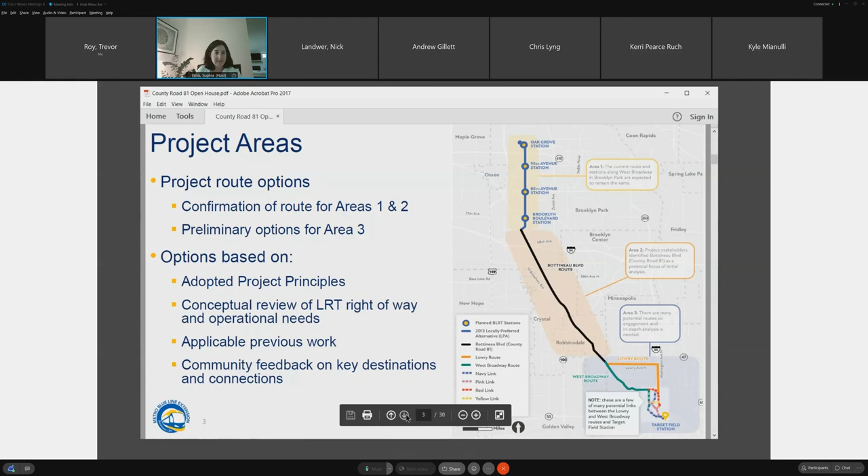The blue line is part of our overall metro system. If you get on a station in Robbinsdale or Crystal, you can connect all the way down to Mall of America, the airport, or anywhere along Lake Street, as well as within the blue line itself, or transfer trains and get across our region. This is about improving transit for our region and having fast, frequent, reliable service that you don't need to schedule for—just hop on and get where you need to go almost any part of the day.

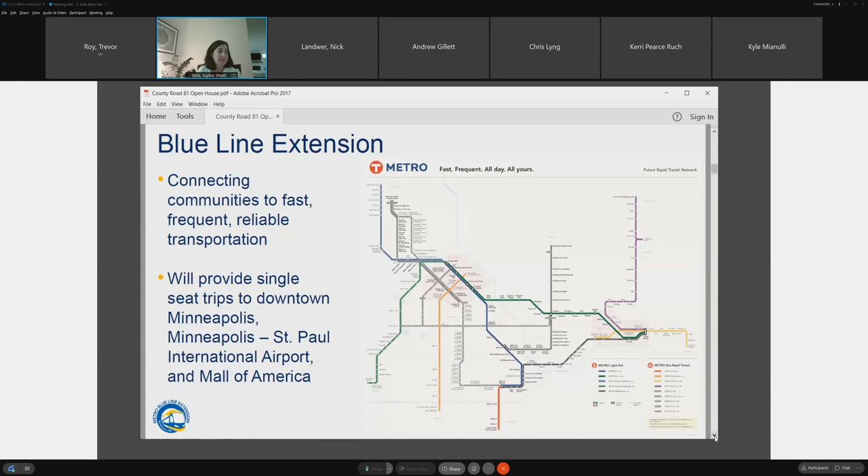So where our project is, we're in the process of identifying a community-supported alignment. Going back to that map, we had a project before, and after negotiations with the railroads really stalled out, it was time to make the decision to move forward and find a new solution.

That solution-finding path is what we're doing this year, maybe even into early next year. But that doesn't stop our project development process. We'll still need a couple years to advance our environmental documents and disclose all the stuff we have along these new routes, then get plans ready for design and construction.

Getting those engineering plans up to speed takes a little time as well. After we're in construction, it'll be another 3 to 4 years to build everything, test and install systems, and all that kind of stuff. If everything goes speedily through all of those steps, we had hoped to open the line in 2028. So that gives an overall feel of what to expect.

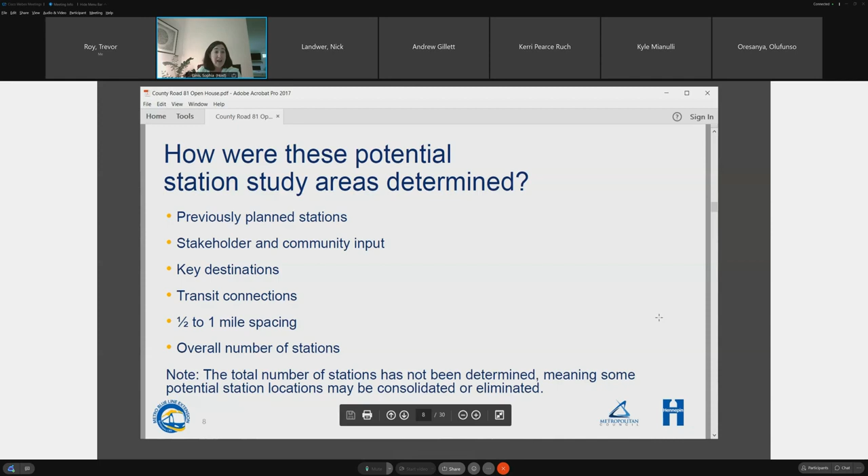The final number hasn't been determined yet, but we have our first blush. So with that, I'll focus on our middle section, but just want to give everybody an idea of what else is in the picture.

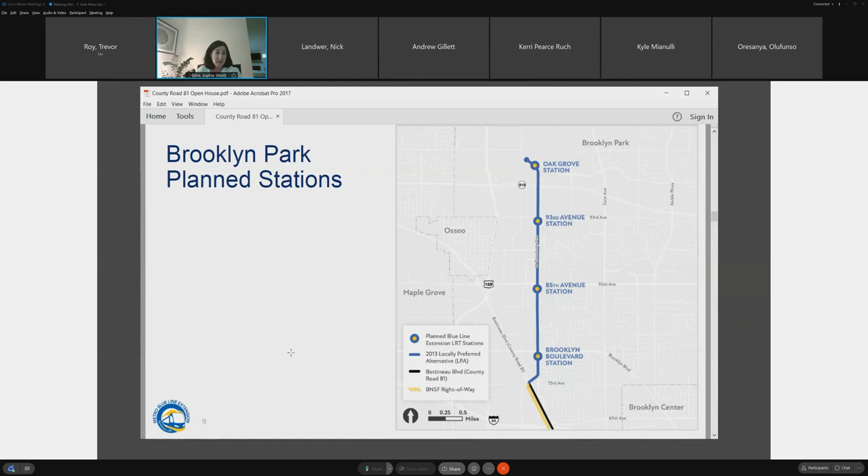Our Brooklyn Park stations on West Broadway can more or less stay the same, we can preserve that piece of the project as it is. We have 4 stations in that area serving education, business, and residential areas.

For our discussion today, and the focus of why many of you are probably here, there are 4 stations proposed right now, kind of along County Road 81. On our map some bubbles are smaller where some station study areas are longer. We need about 300 feet to place a station platform, so there are multiple options or locations where we might place some of them, representing the distance at which a potential placement would be.

So at 63rd, we're maintaining that station area, just placing the station. Same with Bass Lake Road and Crystal.

In Robbinsdale, it's a little further from our previous station locations, but still very much the goal of serving downtown Robbinsdale and the vibrant business district there, as well as some of the denser residential that is in development.

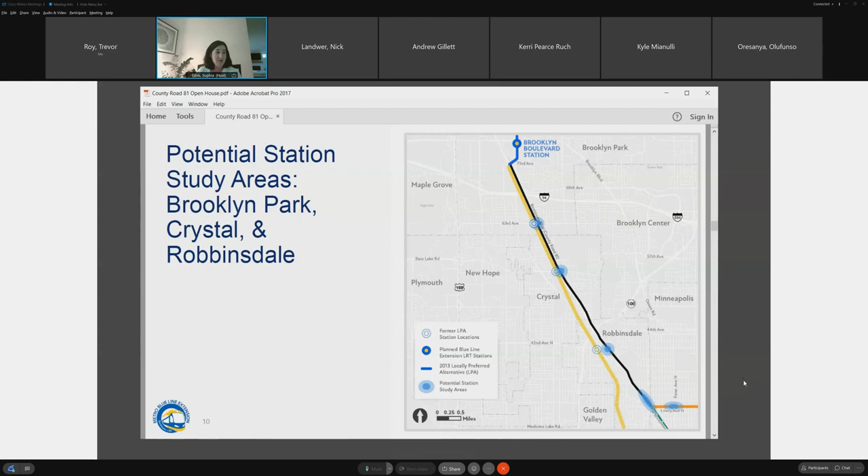This bigger station block, circle or oval, the main driver destination is North Memorial Hospital. In round 1 of the project, serving North Memorial was what we heard the most about as a missed opportunity. So as we asked the community where they wanted to go, serving North Memorial was the most mentioned thing.

I won't go into super detail for the Minneapolis area, because that's probably not why many of you are here today. But just for reference, we're placing some stations whether it's on Lowry or the West Broadway route on Penn, or in the Fremont Emerson area, as well as a couple options as we get into our downtown areas.

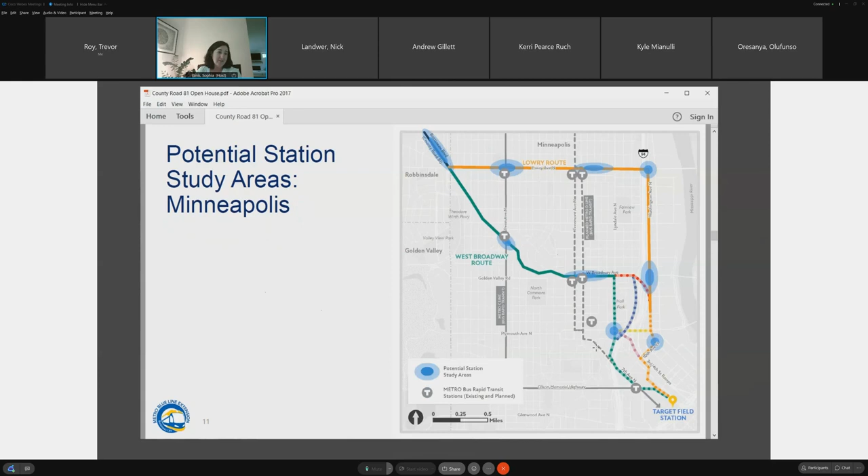So going from here, how are we going to evaluate these areas and actually place stations? It's about what best meets our project goals: not causing property impacts, reaching the most people, improving transit, what we hear from the public in conversations like this today, and the engineering requirements. How does that fit, how does it all work?

Some places are easy to place stations, for others there's a lot of geometry and things to consider. Obviously we're trying to reach people the best we can if we can place stations to better serve them. Available right of way speaks to our project principles - if there's an option between placing a station that doesn't have a big impact and one that does, that's something we'd look at.

Does it serve the people of today, and will it serve the people of tomorrow? So that's the existing and future land uses. The more people that live or work by our stations, the better this line can serve our region.

So with that, I'm going to turn it over to my colleague, Nick Landwer, who leads our design and engineering, and he can walk us through the LRT visualizations.

Okay, well, thank you, Sophia. As we get into this presentation, I just want to remind people that we pulled together these visualizations back in March.

We came out with route alignments to show where the potential routes were that we're evaluating and looking for to move forward into design. A lot of folks said, well, we need to see what this looks like. So we prepared these visualizations to show the context of how the LRT could fit within these corridors and what the impacts are. As a reminder to folks tuning in, these are very preliminary.

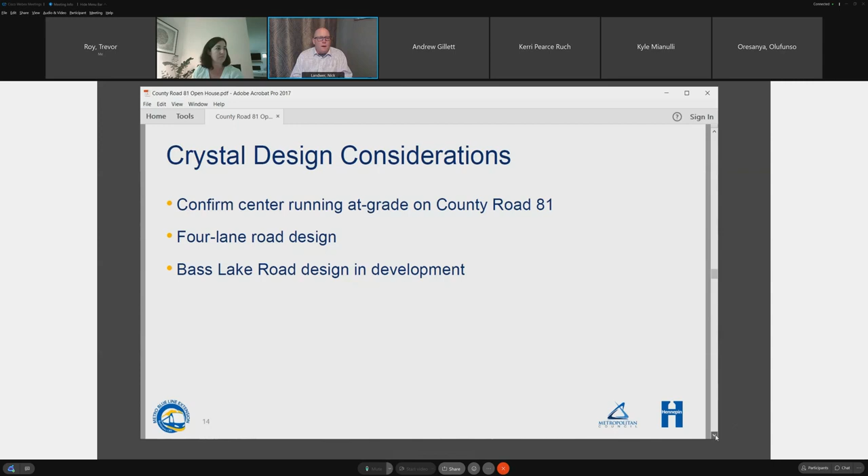Bass Lake Road is one of those intersections that we're looking at. It's a key one where there is a lot of traffic going through there, and we're paying a lot of attention to how we make that operate efficiently.

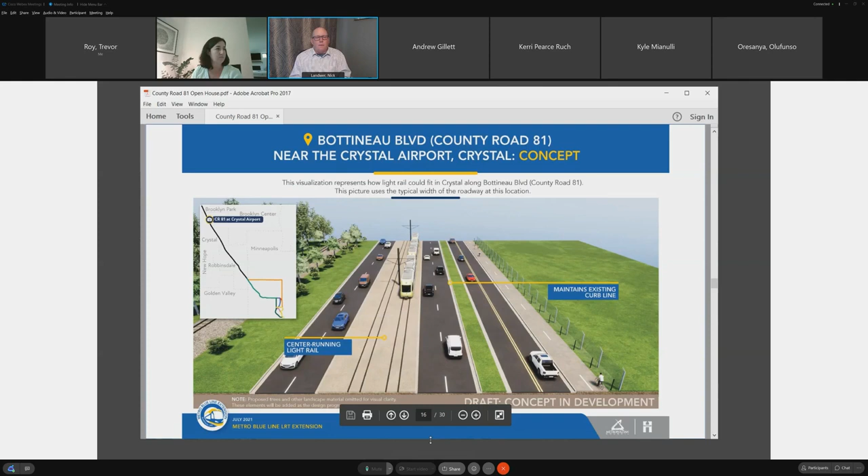So we'll go to the next slide and look at what the impacts are. This shows again the center running at grade light rail, so this is the guideway in the middle. We're able to maintain 2 of those lanes of traffic on either side of the guideway, maintain that boulevard on the east side, and continue to maintain the frontage road through here and the trail on that east side of it.

One thing to note here is as we're going down the middle of these alignments with the guideway, we can pretty much maintain the guideway and those 2 lanes of traffic in each direction within the existing curb line that's out there.

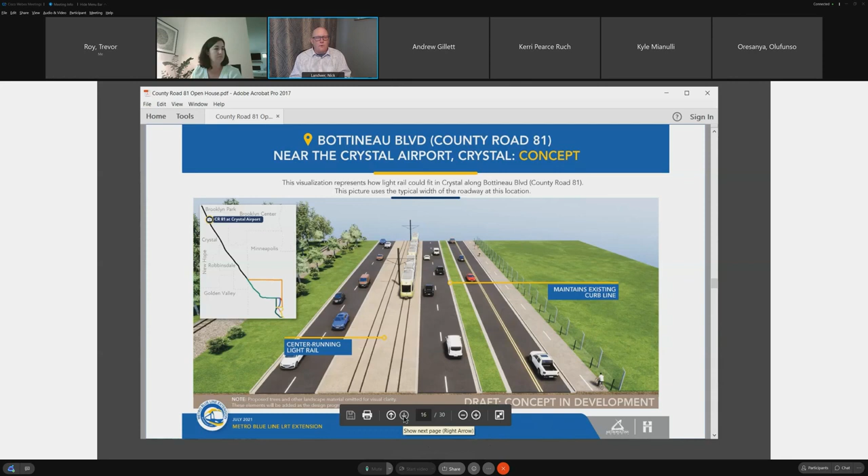So that puts some context of how this fits within the existing conditions.

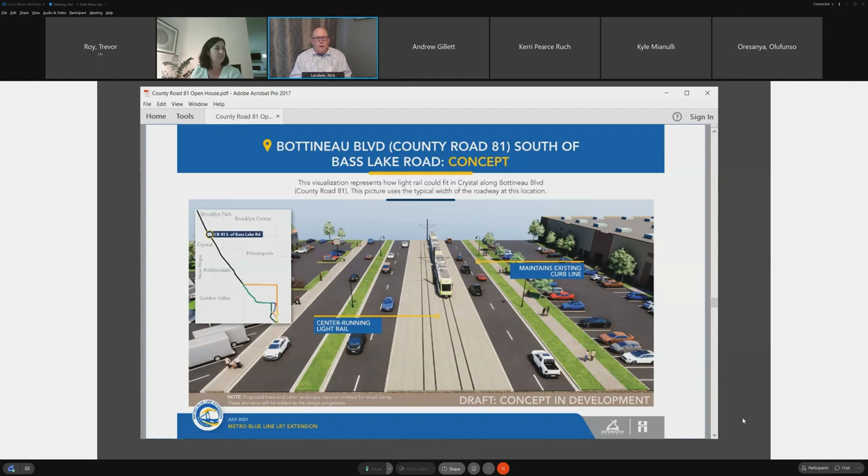So this is the impact with the center running light rail at grade here. We continue to maintain four lanes of traffic, 2 lanes in each direction. We're able to maintain the trails on the outside, and we are also able to maintain the frontage road on the west side, with very minimal impacts to the businesses along here in this rendering.

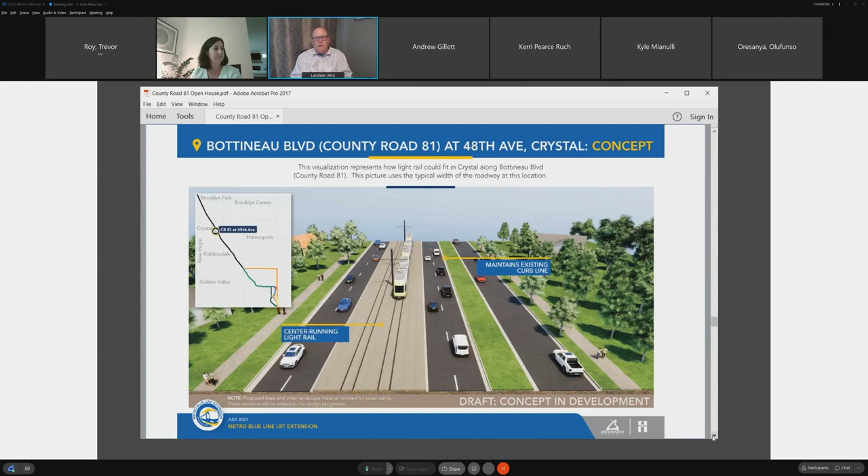With the concept that we're showing here, this again is a center running light rail at grade. We're able to maintain those 4 lanes of traffic pretty much as in the previous two, maintain those existing curb lines that are out there today, and maintain the trails on the outside and that frontage road.

So moving a little bit farther south into Robbinsdale. Some of the design considerations as we get into Robbinsdale, it's more commercial there, more of their downtown area. So we want to confirm that center running at grade on County Road 81 works well and is compatible with how that downtown area operates. We want to maintain those existing intersections, in particular the intersections at 42nd, 41st, and 40th, and 36th and 35th in Robbinsdale, maintaining the full function of those and access through them.

And then we want to really focus on safe pedestrian crossings and that pedestrian environment. One of the things we're hearing from folks is a concern that the light rail could divide up the community and make it less safe. What we want to do is focus on making it pedestrian friendly to get to either side of County Road 81 in this downtown area, to provide safe pedestrian access for the crossings, but also get our customers to and from stations safely and efficiently.

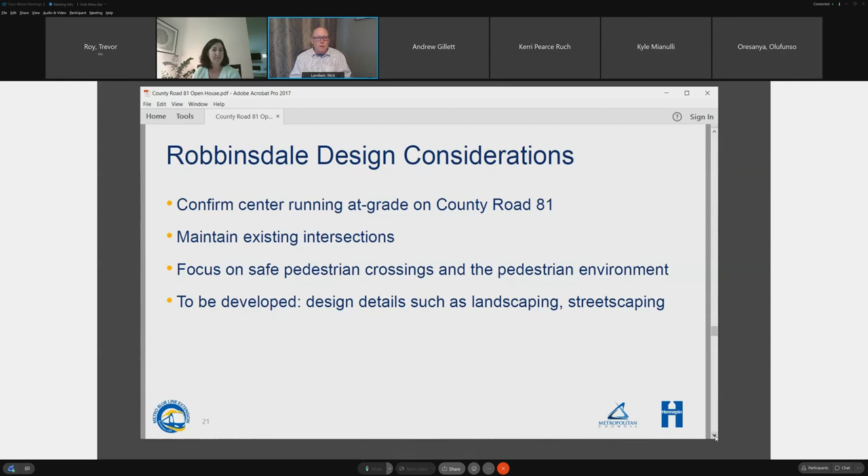Again, I want to remind that there's a lot of design details we need to continue working on as these plans develop. When we get into more of an engineering phase, we'll focus on the details, not only the roadway, guideways, and utilities, but also landscaping and streetscaping and how that fits within the project.

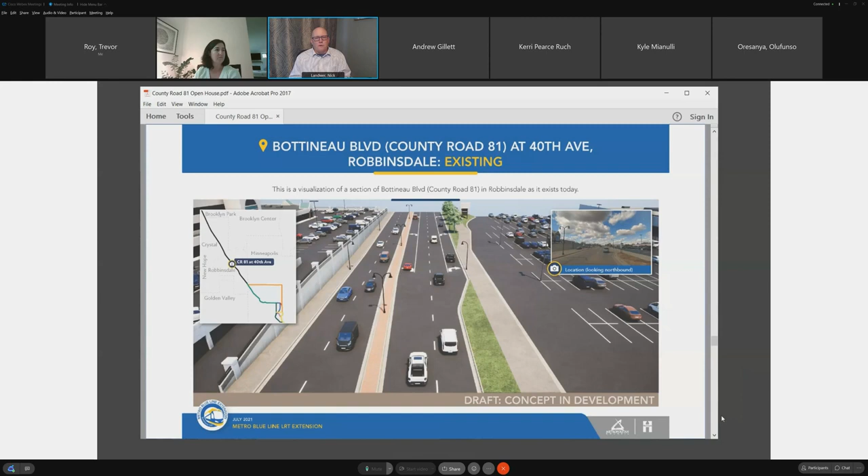So this is downtown Robbinsdale, just south of 41st Avenue, where the picture would be standing above 40th Avenue looking north. You can see on the left-hand side of the screen is Town Center with the retaining wall on that side. There's parking above that retaining wall, and we know there's parking below that also. There's a trail or sidewalk on either side of the roadway. We have a median in this location, and there's 2 lanes of traffic in each direction, so it's a 4-lane road existing here. This also shows the turn lane movements as we're going to 41st and that intersection. On the right-hand side of the screen is Robbins Center, that parking lot showing in that location for the business there.

So as we come down into the concept for the center running at grade, we're able to maintain the trails on either side.

So in this location, we're holding that wall line at town center. Depending on how grades work through here, we need to flatten things out a little bit for the trains so we get a decent grade, and we may need to reconstruct the wall on the left or west side of the screen. But we held that line so we're able to maintain the pedestrian sidewalk on that side of the road, the 2 lanes of traffic in each direction, and the functions at that intersection, the left and right hand turn lanes.

On the right side, or east side of the screen, we maintain that pedestrian trail on that side also. There is some encroachment into the parking lot for Robbins Center, and that's something that, if we have impacts on properties, we'll work with property owners to mitigate for that work and see what we can do to help out or replace that parking as we go through.

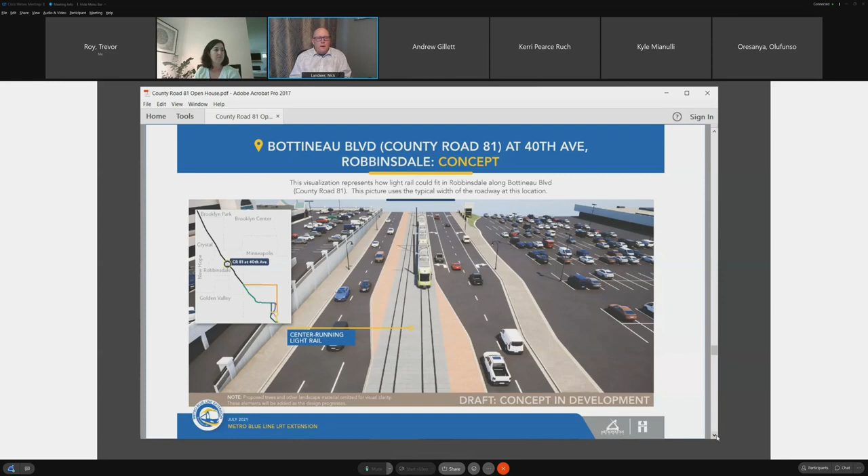One of the things that's been asked from us is, would it be more efficient if we went on a structure through here? So we were asked to take a look at what a bridge would do through this area. Usually when you put in a bridge, you're trying to address a physical or geographical issue, like a river crossing or going over a highway, or some substantial grade difference here.

But again, with the center running light rail, that light rail is running with traffic, so the train itself doesn't impact the intersections or those intersection operations that much. But one of the things we're asked to do is take a look at what a structure would look like, and this structure could be along the whole alignment also.

What we did find though is with the geometry of where you need to place the columns to hold the bridge up in place, and how they're placed crossing intersections, and again with turn lanes, a bridge really doesn't save us a lot of room on the roadway. It doesn't get us back a lot of space, maybe a couple feet here and there, but it's not a substantial difference from what has to be there to protect those columns, give them some clear zone, and with left turns and those left turn shadows that increase the median size.

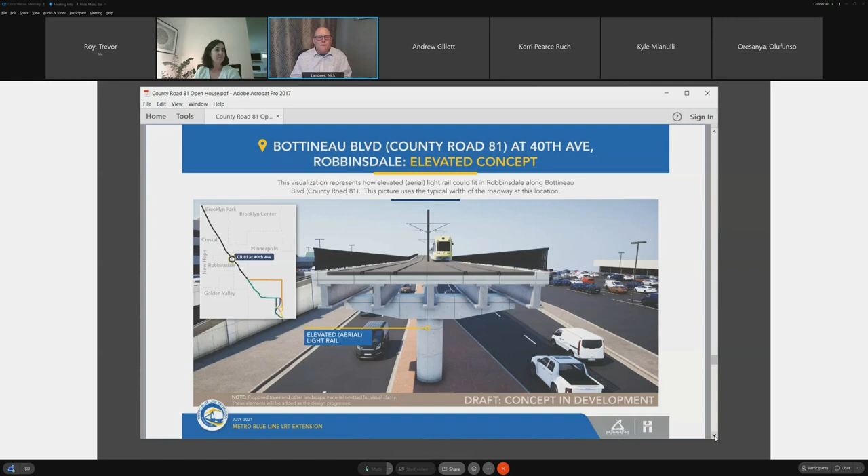And this is the concept of how the light rail will fit in there. We use a little bit of the space in the boulevards, and we use that median space for the guideway. We're able to maintain the 4 lanes of traffic through here, maintain those frontage roads on either side, and the parking over there also.

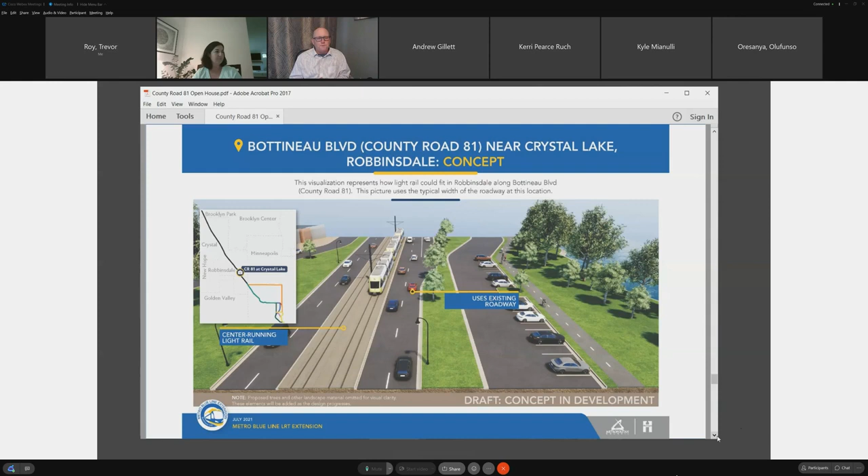So if we go to that concept, we're able to maintain those 4 lanes of traffic through there, maintain the frontage roads on either side, and in this condition, we're able to maintain the boulevards on either side, as well as the pedestrian and bike facilities for the sidewalk and the trails.

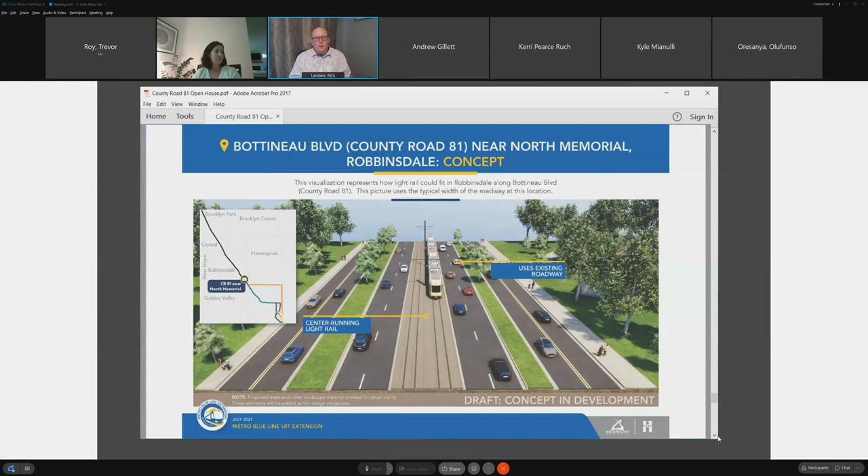So again, we'll take some questions here, but one of the initiatives we're working on as we're rolling out our project design is making sure we're building community wealth within the communities as we move forward. We've heard concerns about anti-displacement from the project, whether economically or from the impacts of the project.

So our project is forming an anti-displacement working group that will work parallel with the project to help address some of those needs and issues we're hearing from the community. We want to make sure we're developing and implementing comprehensive initiatives and strategies, and that the project's investment builds on and supports the existing community and assets that are there.

We want to make sure we're benefiting the existing corridor residents, and this isn't just for folks in the future—it's for the folks living here now who will be living there through construction and to opening. We want to provide more opportunities for equitable housing, employment, businesses, development, cultural experiences, and other day-to-day life activities.

So we want to make sure that, knowing there are impacts to the community as we're constructing a project, we turn those into benefits. We want to benefit the community through that construction and through those impacts.